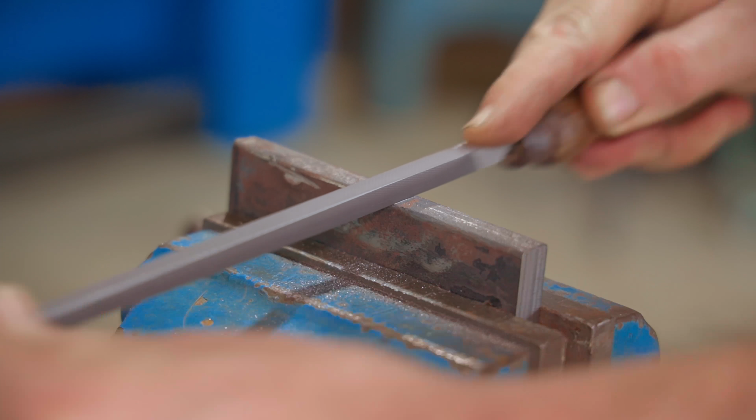You may already know that I'm a little strange. I actually enjoy filing, even though I've always wanted a die filer which will help efficiency, but it would also help in keeping the file perpendicular to the workpiece and increase accuracy. While looking for inspiration, I kept falling on this 100-year-old Hartford die filer, so I modelled something very similar in Shapr3D. I won't be building it on my own though.

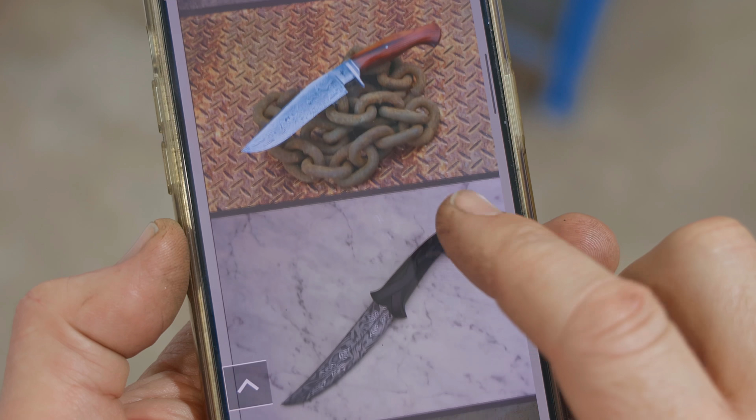I'll be getting some help from my mates Corin and Keith. You may remember Corin from when we built the kayaks together, and here's some examples of Keith's work as a world-renowned knife maker. Anyway, let's get into it, and the first thing we'll make is the base.

I want the whole thing to have a bit of weight to it so it doesn't shake around all over the place, and that's why we're using this cast dumbbell weight. We'll start by truing up one side and then we can flip it over in the chuck where we'll get a better hold in the jaws.

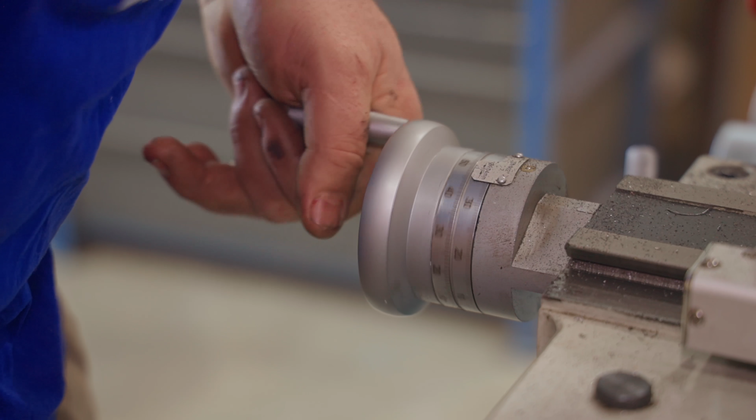Casting the body of the die filer would be the best way, and casting is something that I definitely plan on trying out, but at the moment I'm not set up for it, so instead we'll fabricate it using bits of old castings and steel. The cast iron chips or dust make a real mess of the lathe. I did order some way covers, but they didn't arrive in time.

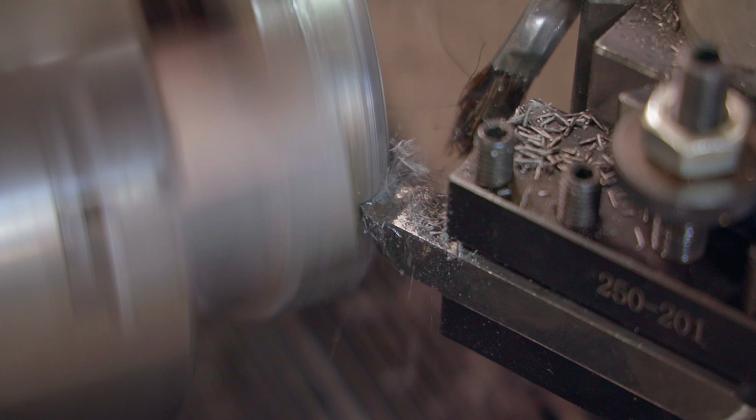Just after starting, the way covers came in the post, so we fitted them temporarily with magnets. I will fit them properly later on. Corin and Keith were visiting this week and we wanted to make a project. We had no real plan, but when I told them about upcoming projects, they jumped at this one.

One side done, now for the other. This one will be the top and have a bit more shape to it. First we'll bore out the centre, which the next piece of the body will be made to fit into. It's going to be a small die filer, but hopefully it'll be a very practical and usable machine. The main thing I want is variable speed and that the whole thing runs smoothly and not too fast. It may be surprising what we plan to power it with, but I'll save that for later in the video.

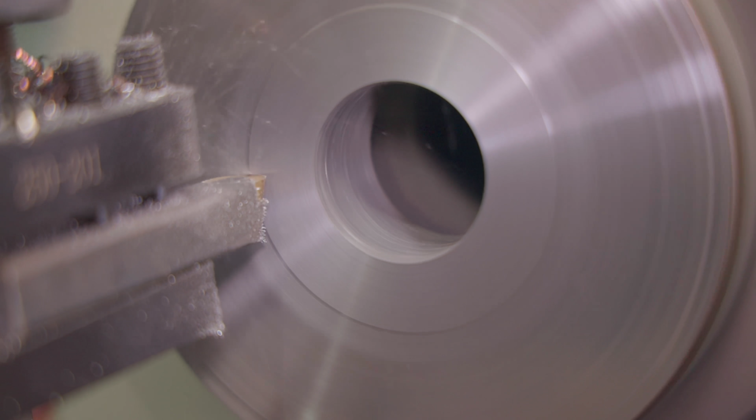There's quite a few parts to the whole project, which to get done in the 3 or 4 days that we had together, we just had to get on and make the parts where we could. So I'm showing them in an order that makes sense and not exactly when they were made. There was a lot going on. Corin and Keith did a fair bit of the work with me doing some and helping out here and there and running around filming the whole process.

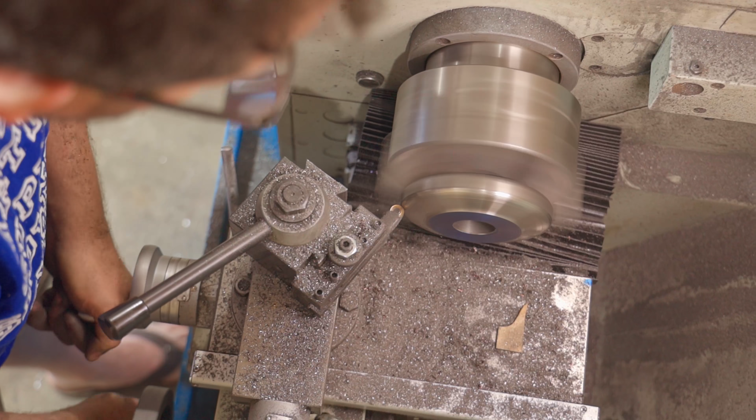The template was just a rough guide, but we turned it down to something close to it. There was a lot of mess that needed cleaning up before moving on to the next part, which will also be turned on the lathe. The cast iron dust is not good for the ways, it can wear them out and it gets everywhere.

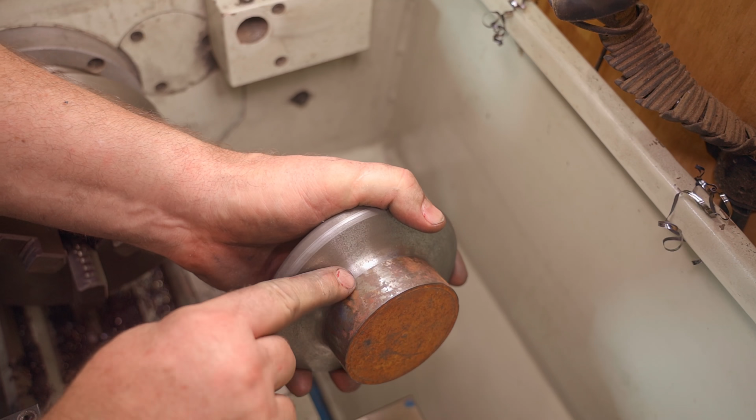The next part is steel and we'll turn that to fit into the base. I'm not sure what type of steel it is, but it is free machining and it's an offcut from a local CNC workshop. Next we'll turn down a taper to add a bit of interest and make it a more pleasing shape, but first we'll face off what will become the top surface.

While Corin was turning these parts, Keith was working on the main upright, which was cut from a sheet of 16mm thick mild steel plate. We'll attach a template using thin CA glue.

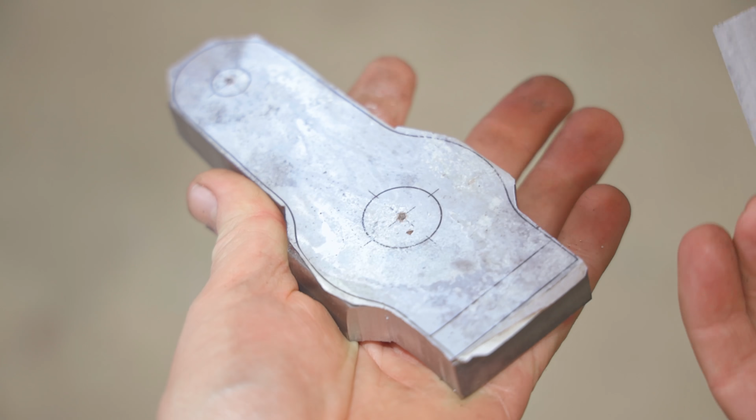Keith also cut out a second piece which will be a top support and that'll get attached to the main upright. He's cleaning them up on the awesome new Brodbeck grinder, which I'm really enjoying, with lots of accessories, making it super versatile. We need to drill a couple of holes, one for attaching a table and the other for a bushing which will carry a shaft from the motor.

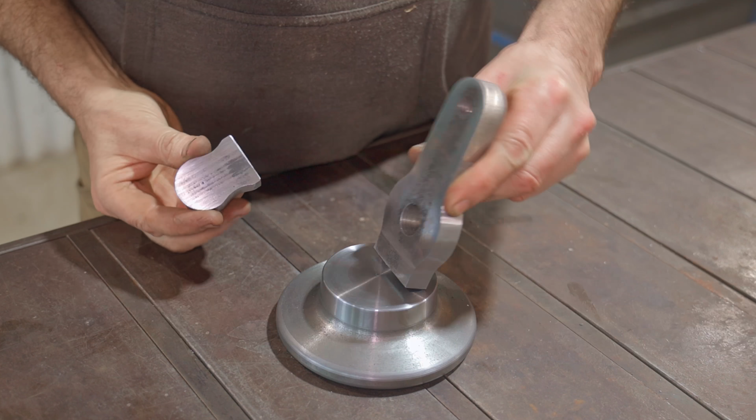This is how the pieces will be arranged, and we turned this other piece off camera, which will be a boss on the back of the upright, and next I'll weld that piece on.

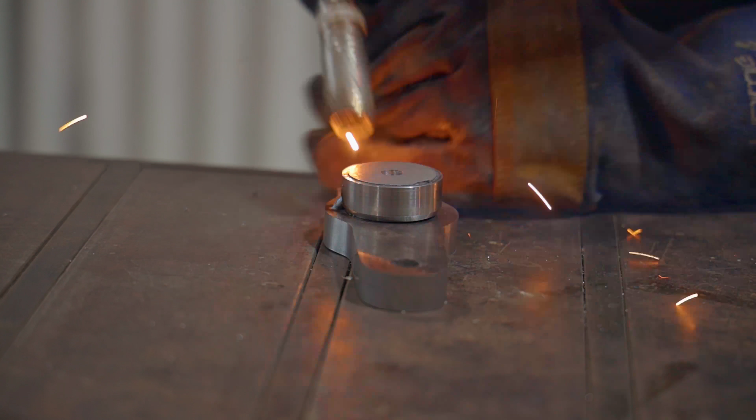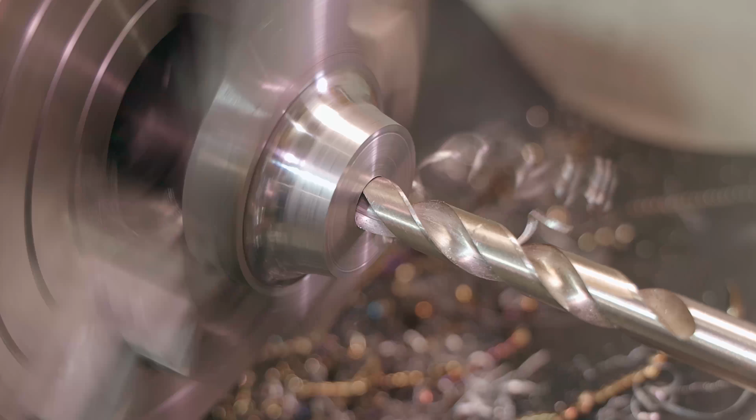Next we put it in the 4-jaw chuck on the lathe and set about machining it. It doesn't look like we're doing anything here, but we are cleaning up the whole face of the upright. We didn't completely clean up my welds, but a bit of filler here and there when we come to paint it, and you'd never know. Next we bored it out to the final dimension, ready for a bushing.

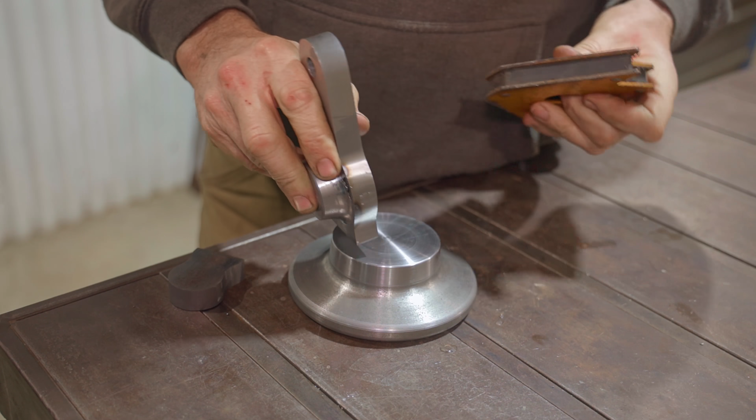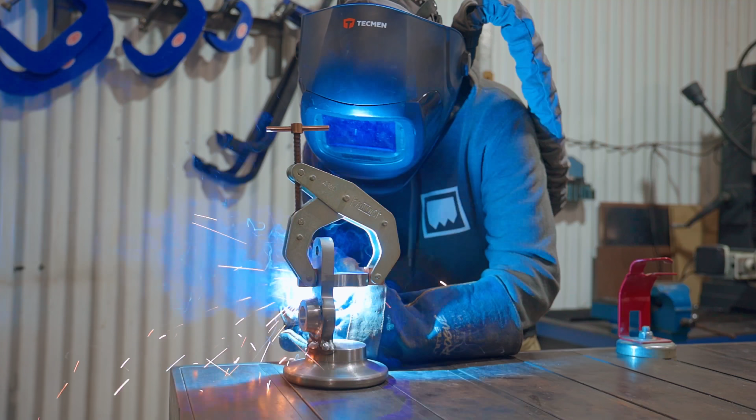Now that all the pieces for the body have been prepared, I'll weld them together. I've added a bit of extra weld on the side so we can sculpt them later on and make nice transitions. That was the end of the first day, so the next morning Keith took it into the grinding room and started to shape and refine it.

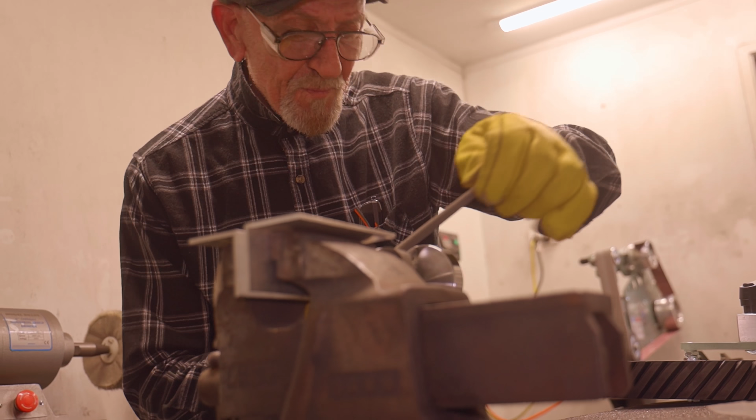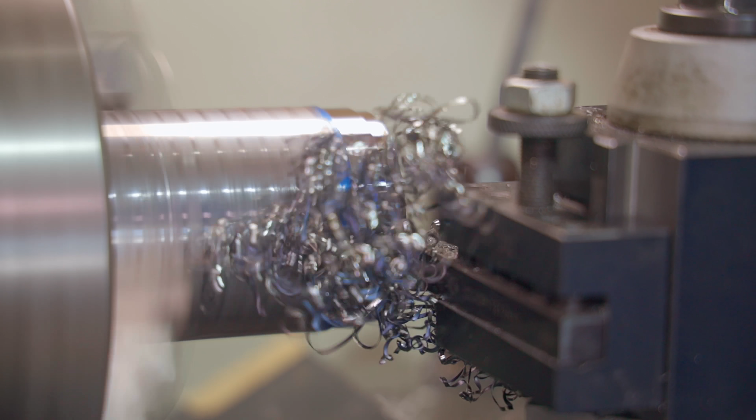Next I'll glue the column section into the cast base, and to do that I'll use Loctite. The pieces are a great fit, so this should glue together very well. While that's setting, we'll start working on the flywheel, which we turned from a piece of EN26 steel. We'll cut a decent chamfer on the back of the flywheel to give it some clearance as it gets close to the weld fillets on the body.

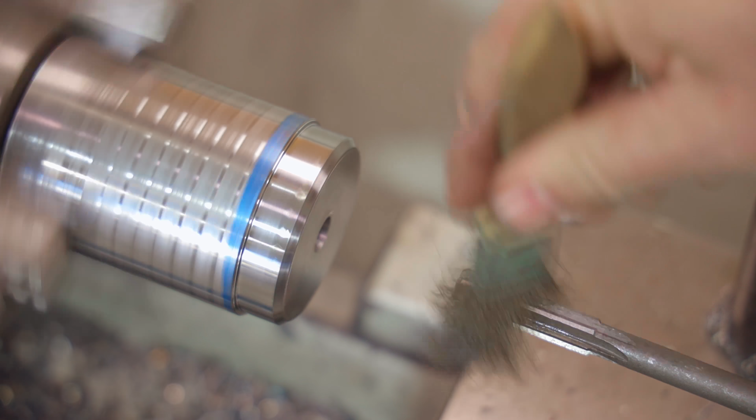We need to add a dowel pin to the flywheel that's off-center. This will create a cam and drive the main vertical shaft up and down. I'm using one of Corin's awesome carbide center punches.

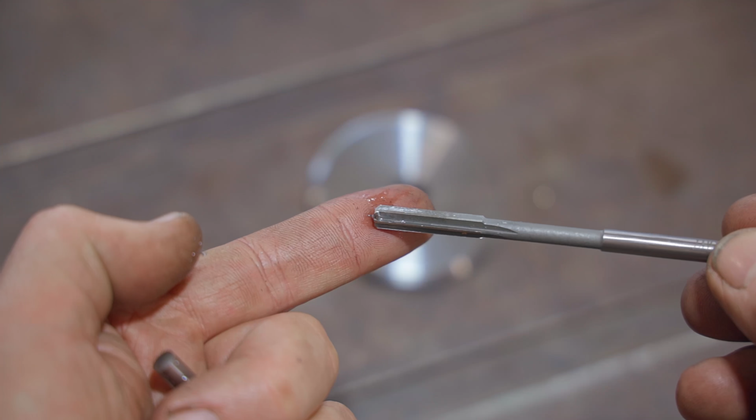After drilling the flywheel, I then reamed it, but this cheap reamer ended up being oversized. So we took the Niroc carbide center punch, and Niroc is Corin backwards by the way, and created divots all the way around the pin. There's no way a regular center punch would do this, or at least it wouldn't without any damage, as the pin is hardened steel. We did get a bit ahead of ourselves there, as the pin is too long and it needed cutting down to length, but we let that set and then we cut it down off camera.

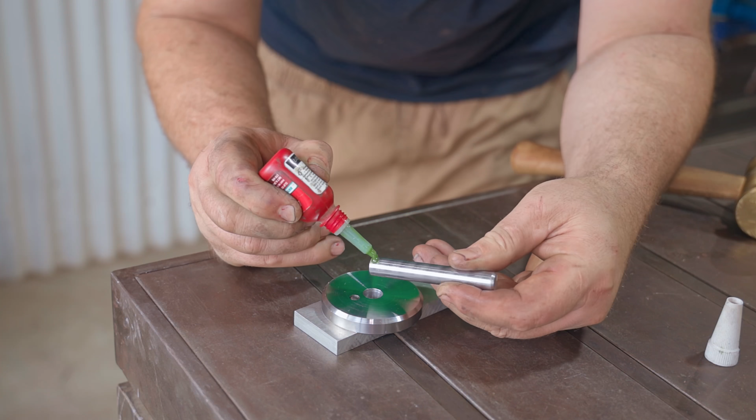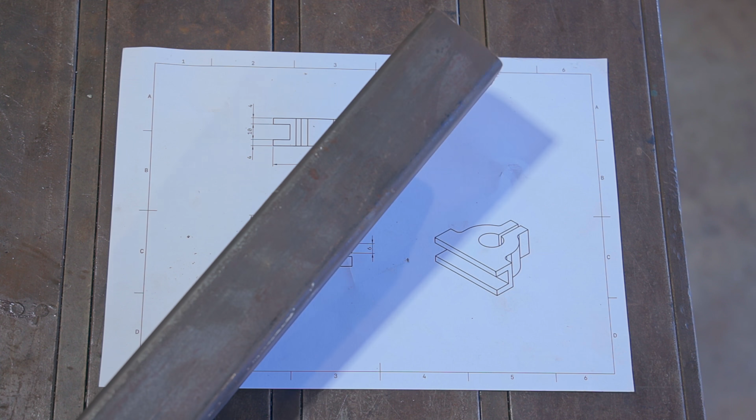Next we'll glue in the drive shaft, which is made of silver steel, and fortunately the reamer for this worked very well and it was a good fit. Next, we'll make this part that clamps to the main shaft. It needs to be 18mm thick. I don't have any flat material that thick, so we'll take a slice off this 50 by 50mm square bar.

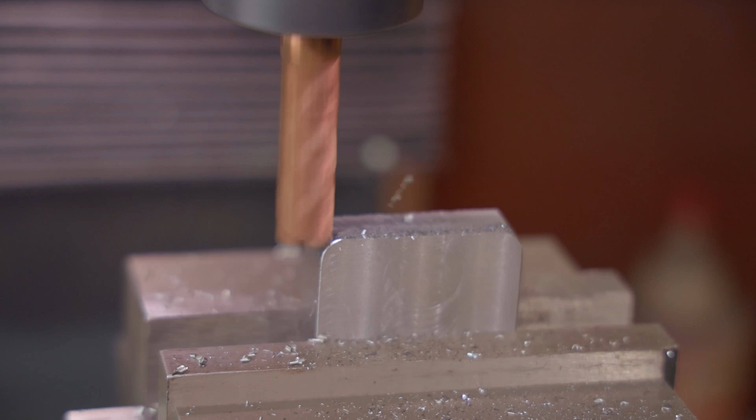We'll shape the outside later on, but first we'll face up this edge and cut a slot. A square nut that will sit on the pin of the flywheel will also slide in this slot, and that will transfer into an up and down motion.

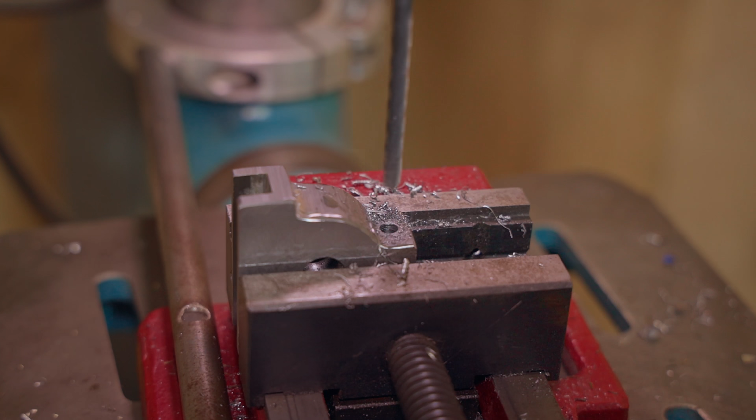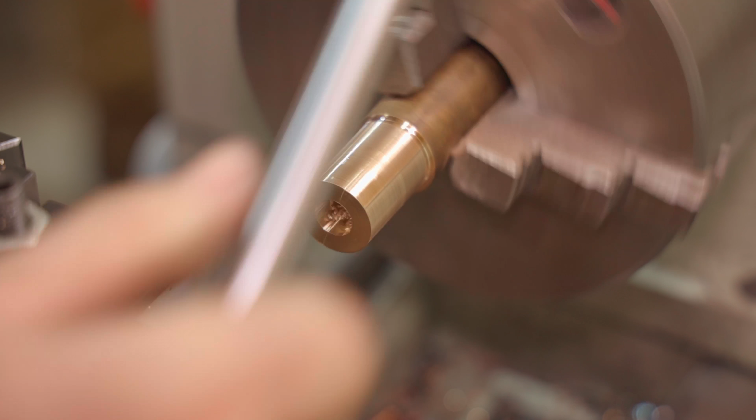I'm drilling all the way through the clamping section with a tap drill. Then after tapping the threads, I'll go back and drill out the threads on one side for the bolt to pass through. That's the clamping piece done, so now we'll make the main bushing from a piece of bronze bar stock. We don't need any glue here, we'll press it in as it's a super tight interference fit.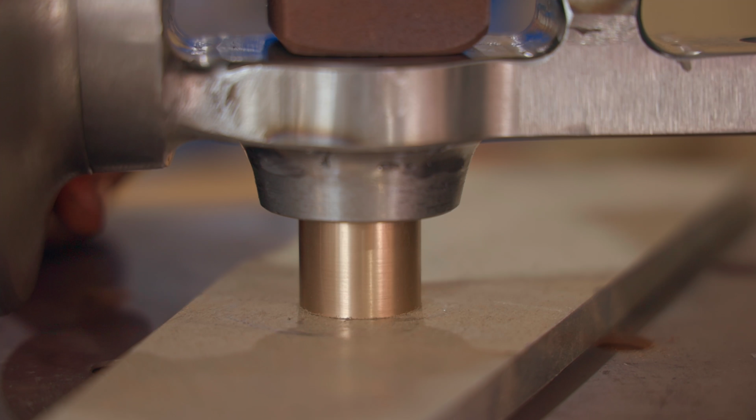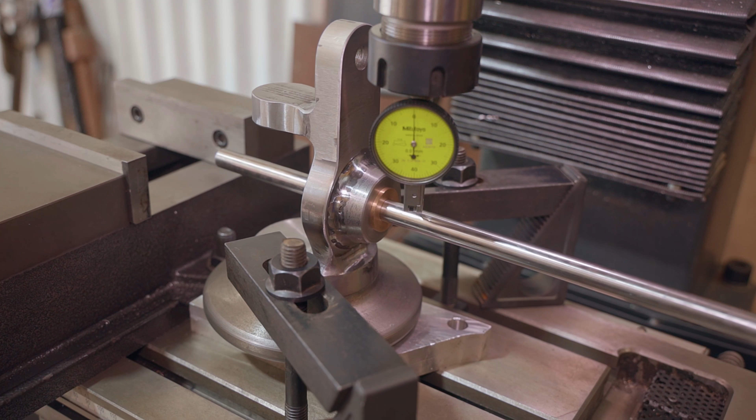That went well, so next we'll bore out for the vertical bushings. We've indicated a horizontal shaft across the top and the side, so we're confident that the bores that we're about to drill will be perpendicular. The drill bits are just about long enough, and drilling both holes now after it's been welded together ensures that they'll line up. We're going through with increasing size drill bits, and the final size will be 18mm.

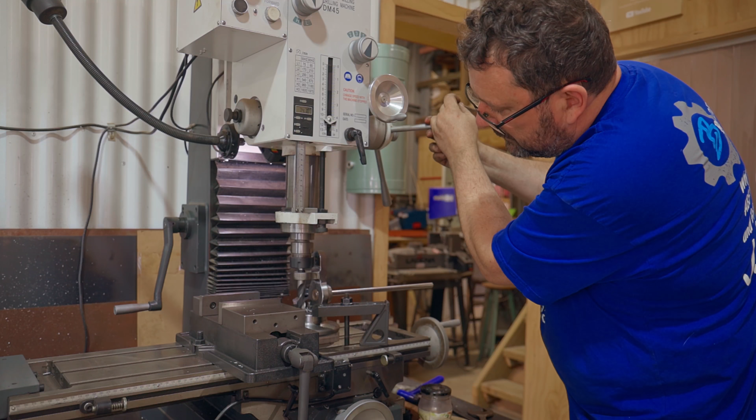And here's the bronze bushings ready to glue in. We left those to set while we had lunch and then came back and drilled them while it's in the same position.

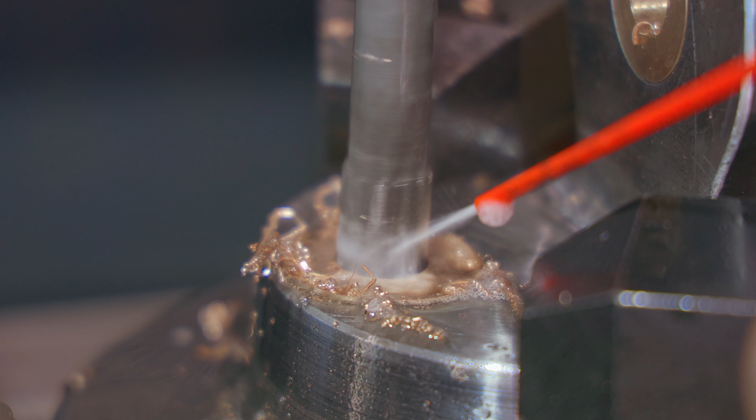That's just about perfect, but the one thing that we did forget to do though was drilling mounting holes in the base. We were supposed to do that before welding on the base, and now it's going to be difficult to access.

First we need to machine a flat, but I don't have an end mill long enough, so we've ground this old cheap drill bit to see if that will work. We need a flat for mounting the screws to sit against and also to help drill the holes. It's deflecting a little and it's not perfect, but it is working and it's getting the job done.

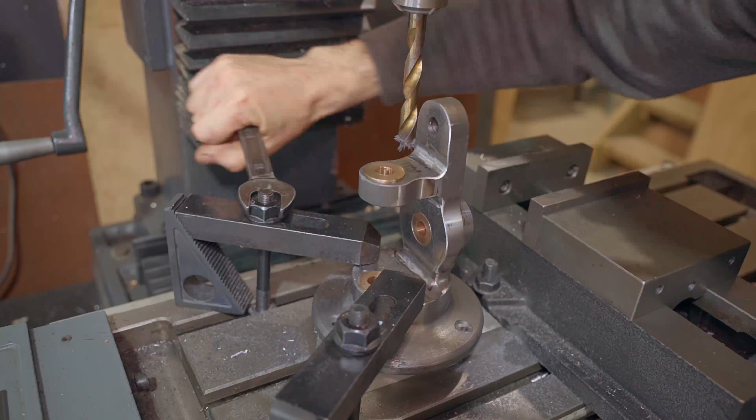We milled the flat again after drilling the hole, and the modified drill bit was a lot happier with the centre gone where we drilled the hole. So much better. We did the other two off camera, so next we'll make the cam nut and we'll do that from bronze.

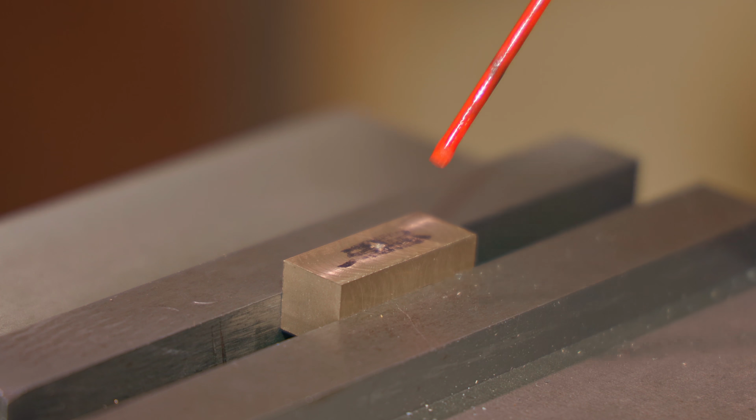Once more, there you go, that's it. That's all the parts that we need to try out the mechanism. I'll quickly assemble it and power it with a cordless drill.

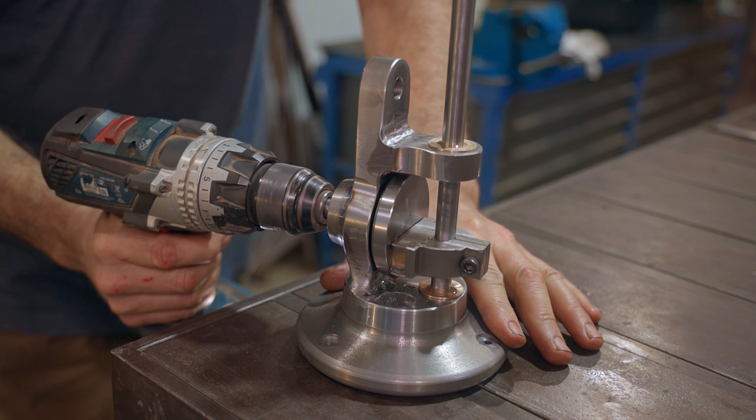That was amazing and it looks like it's going to work well. Next we'll make the table, and again we'll use a dumbbell weight as I really want a cast iron top. Corin turned a shoulder on it so we could mount it better in the chuck, but first he decided to remove the bulk of the material on the belt grinder before machining it.

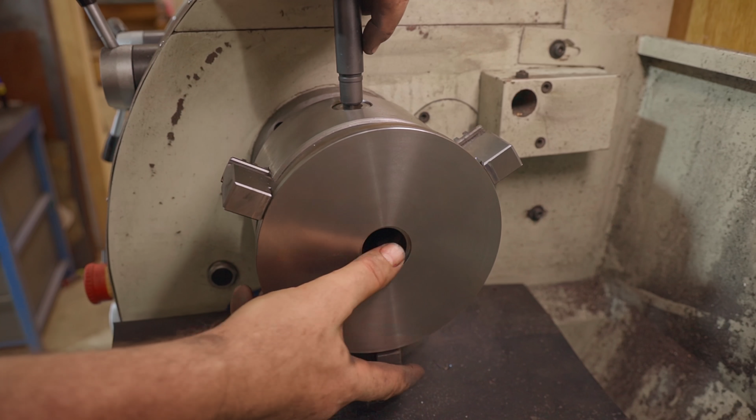After boring it out, we machined a recess for an insert to fit into. That came out amazing. Off camera, Corin turned off the lettering underneath. It's the end of day 2, so I painted the underside of the table, the body and the clamping piece so they can dry overnight.

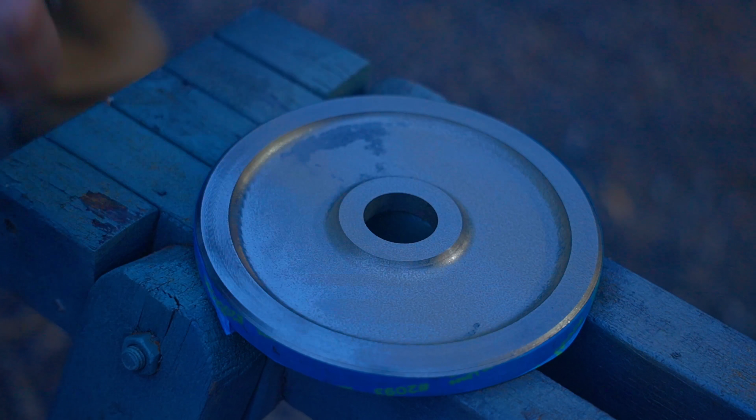The first coat dried in about 15 minutes, so I filled it with 2-part filler, sanded it back and put a couple more coats on. Next we'll make a bracket from this angle to attach the table to the die filer body. We're actually still on day 2. We've decided to go back into the workshop after dinner and do a bit more. Here we're shaping the bracket to fit the underside of the table.

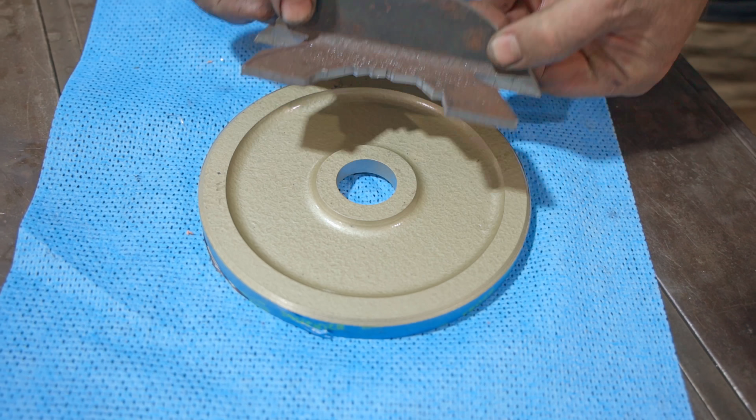We've got the small wheel attachment set up on the belt grinder and cleaning up the bracket.

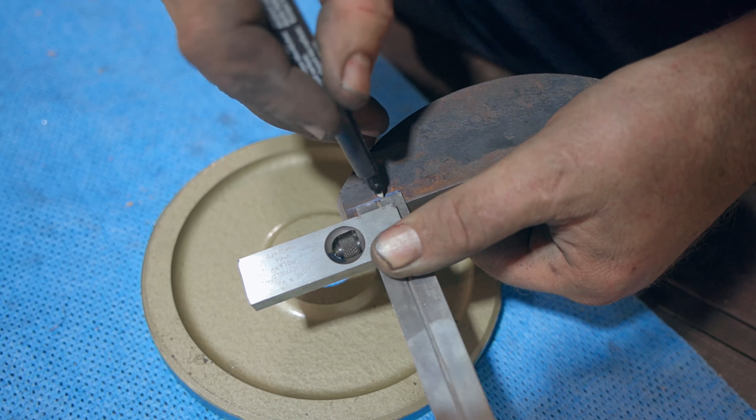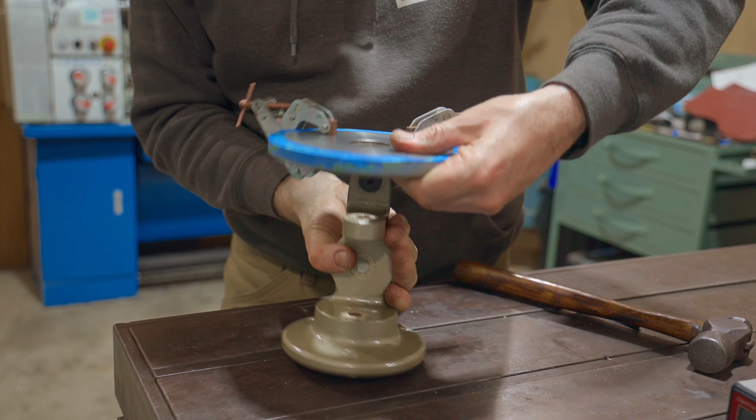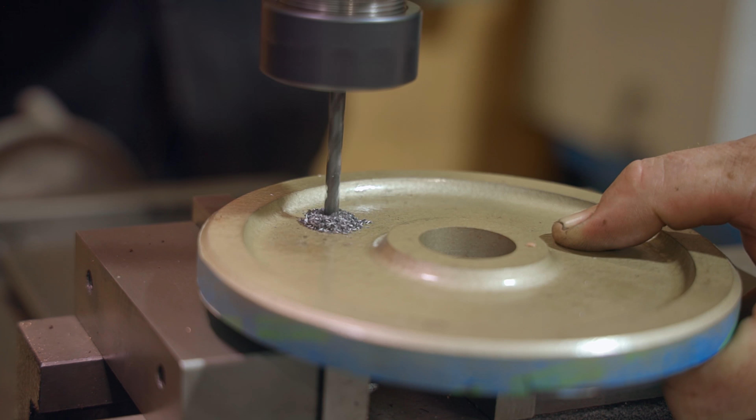To mount it to the table, we'll use 4 bolts. We'll drill through holes in the bracket, transfer those onto the table, and then drill and tap them. It would have been easier to drill all the way through and just use nuts with countersink bolts, but this will be much nicer. We did 2 holes first, bolted it in, and then transferred the other 2 holes.

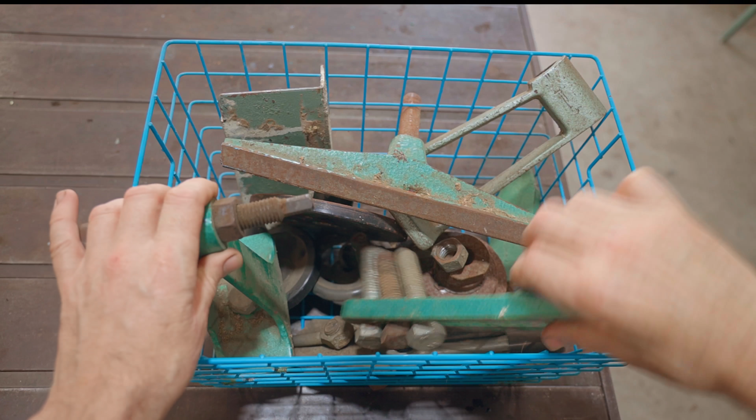It's all starting to come together. Next we'll make an insert for the table. I'm looking through all these cast pieces left over from an old broken lathe for something suitable. The next piece is a wiper on the top bushing to help prevent filings from getting in there. We'll make an oversized guard from brass with a single mounting hole and then an insert from Delrin that will fit against the shaft.

Corin came up with a clever idea to use the burr left over from parting off the insert, and we'll use that as the wiper, and this was the reason for using Delrin in the first place. We're starting to get close, so next we'll make a pulley from aluminium that will be belt driven from the motor.

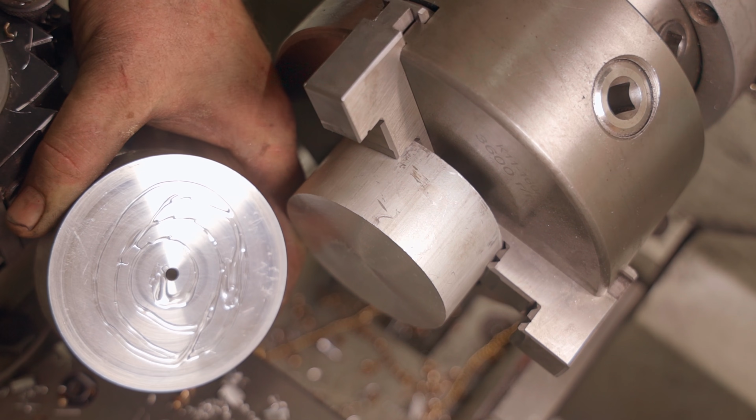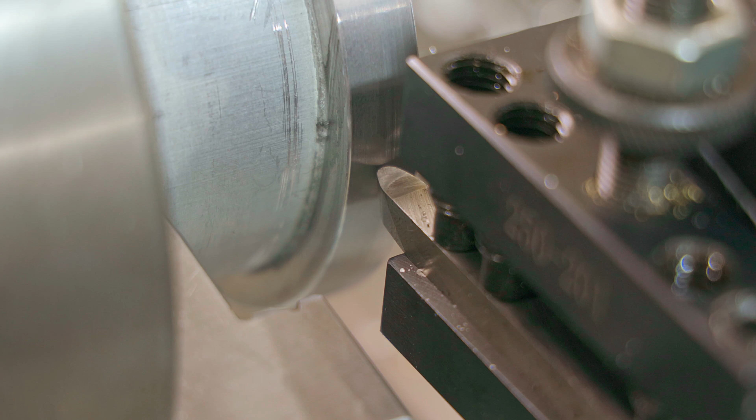And here's how we're going to power it. A sewing machine motor. It's already variable speed, which will be perfect. We're not 100% sure how well it will perform, but we're pretty confident. We've ground the form tool to match the pulley on the motor, so next we'll cut a groove in our pulley.

That's the pulley done, so next we'll drill the end of the vertical shaft to accept a file. We'll then drill and tap through the sides of the shaft for grub screws to hold the file in place.

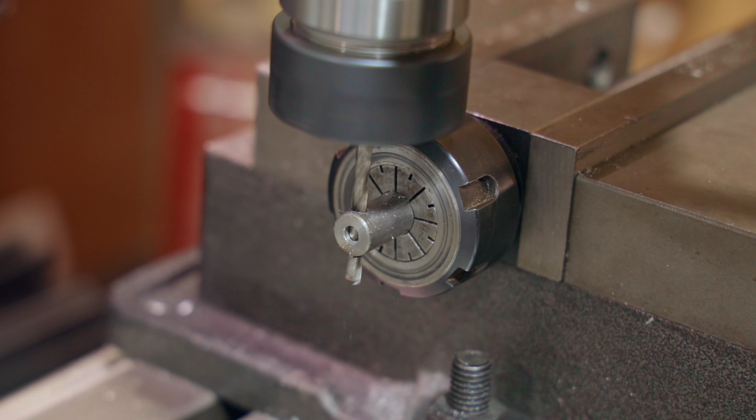We're moving along quickly now as Corin and Keith want to see it running before they leave. Anyway, the next part is an aluminium block for mounting the motor to a board, which I'll prepare next. It's a piece of reclaimed silky oak. I won't do anything special, just clean it up a bit, add some filler and put some oil on. While I'm at it, I'm preparing a couple more boards for Corin that he'll use to display his tools when he's selling them at shows.

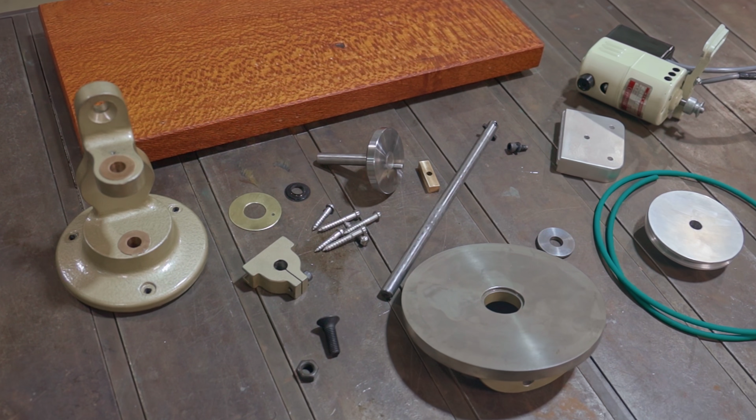That's almost all the parts. We just need some mounting screws. These stainless steel lag bolts will work, but I'd like the heads to be domed and slotted, which will suit the machine much better.

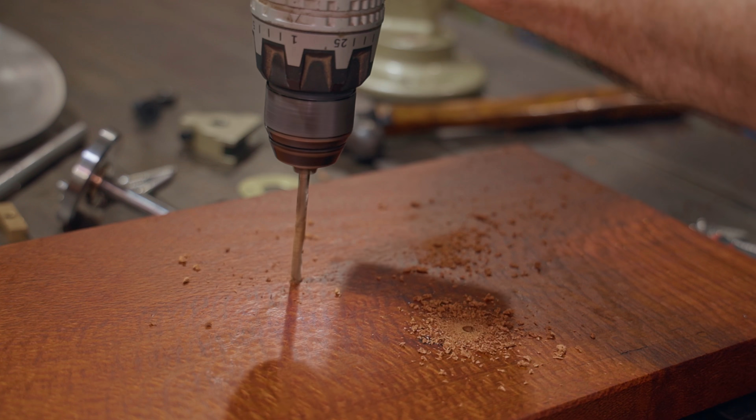So now the exciting part, putting it all together. We made a couple of bronze washers off camera. You can see one of them here already on the back of the flywheel. I also remade the bronze nut as the first one wasn't quite long enough. We haven't ground a flat on the shaft, but we'll see if the pulley slips, and I can do that afterwards if needed.

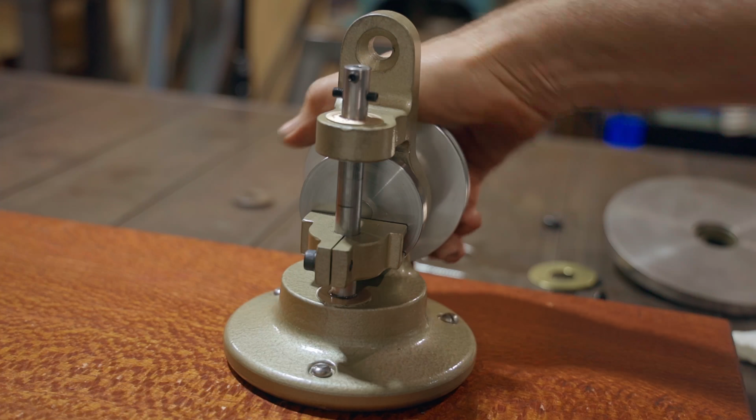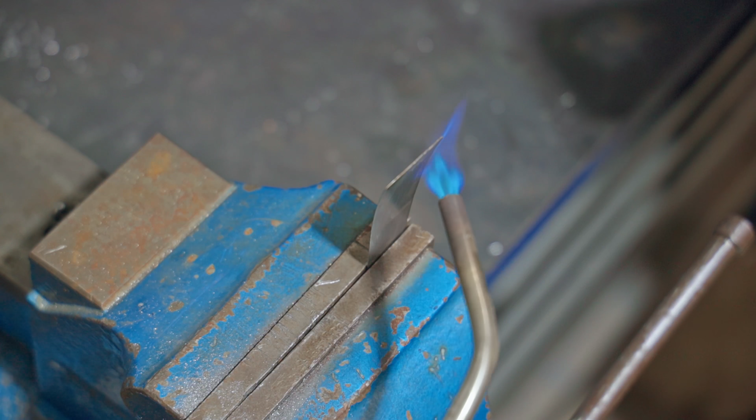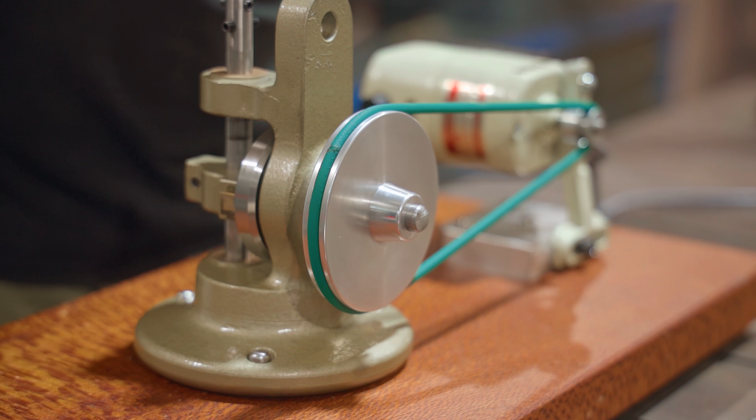We need to cut and join the poly belt. None of us have done this before, but it was actually very easy. That looks like it's going to work with plenty of control of the speed, and it's not jumping around all over the place. I didn't show it earlier, but you can see that we drilled and tapped holes in the shaft at 2 different heights. This should allow us to make fine adjustments to square up the file to the table.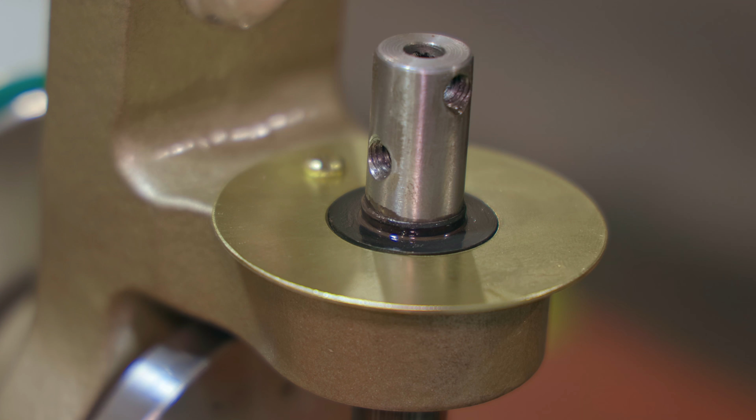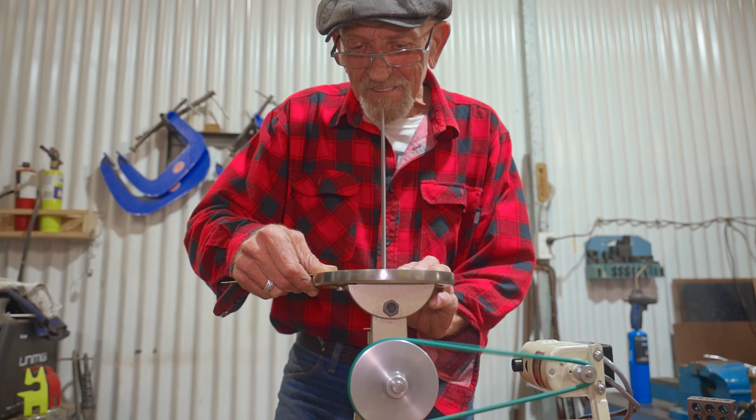The files for this need to be parallel, so to start we'll use a chainsaw file, which is the perfect size. We'll mount it from the tip so the files are cut in on the downward stroke, and again the chainsaw file tip is the perfect size. It's ready to go, and Keith jumped in there first. We'll cut the file down next, and then Corin can have a go. Don't do much. It's working great, and that's a fairly fine file.

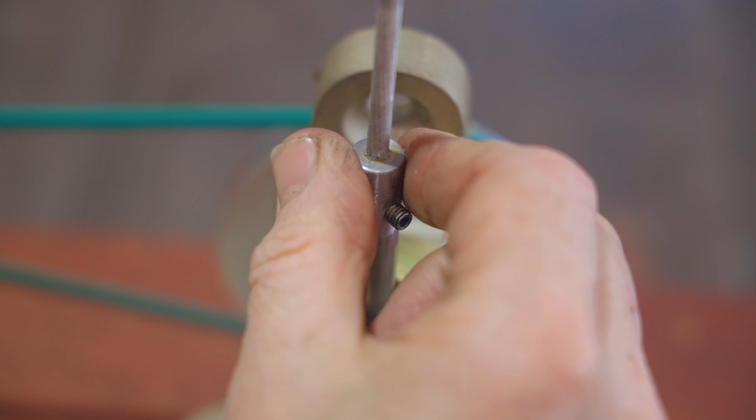Anyway, it was all a bit of a rush at the end, and the guys have now left. I've got a couple of things left to finish. I rotated the shaft 45 degrees, so now I can access all 4 grub screws. The way it was, the one at the back was difficult to get to. And I also made this top hat off camera. The original die filers had a piece like this, but they were used to hold the file in place. I didn't realise that it also deflected filings away from the shaft, so I decided to make one.

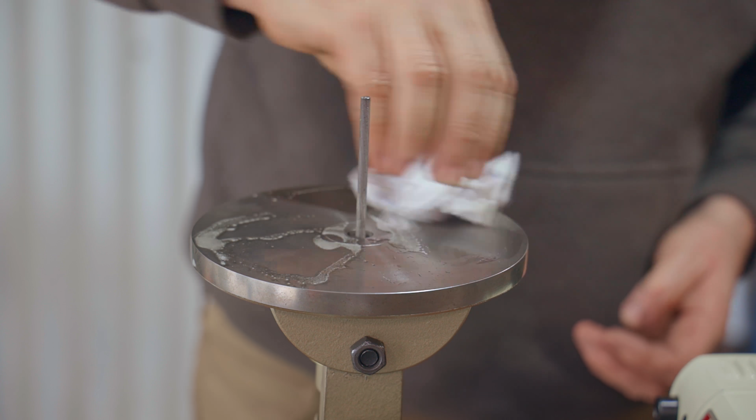To prevent the table from rusting, I put Boeshield T9 on, which works amazingly well, so now it's time for me to give it a go. It's a great little machine and it's super fun. I need to make some other files fit as well, and I have a plan how to make that happen. I'll cut this square file down first and then I'll show you the setup.

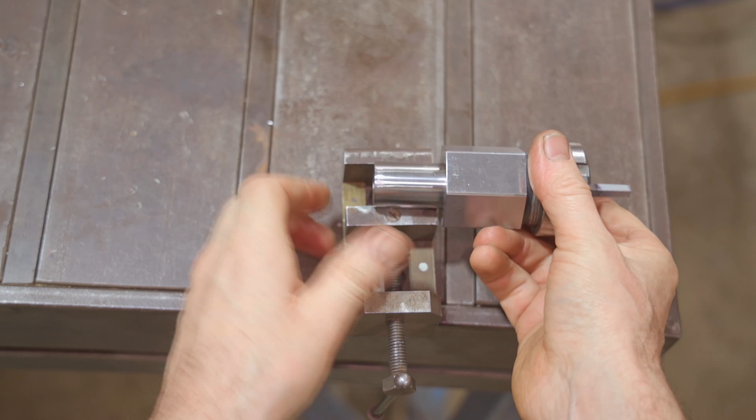I've drilled a through hole and turned down this bar with a slight shoulder. It just about fits through a collet block, and the shoulder is enough to stop it from going all the way through. I then made a collet out of Delrin to hold the file in an ER collet. I'll hold the shaft in a vise, and then I'll be able to spin the collet block with the file to grind a tang on it. That worked out great, so let's put it in and give it a go.

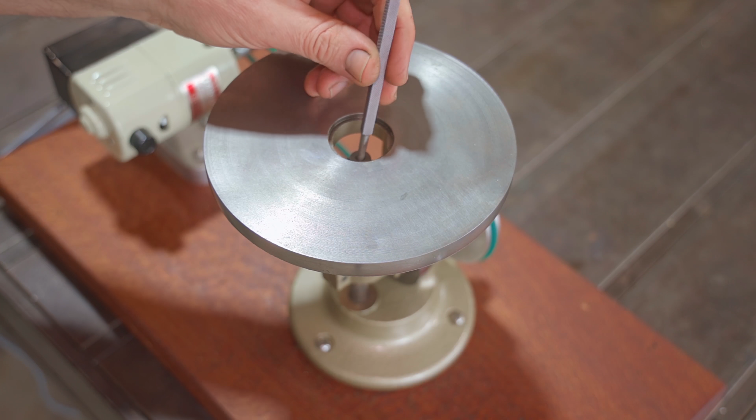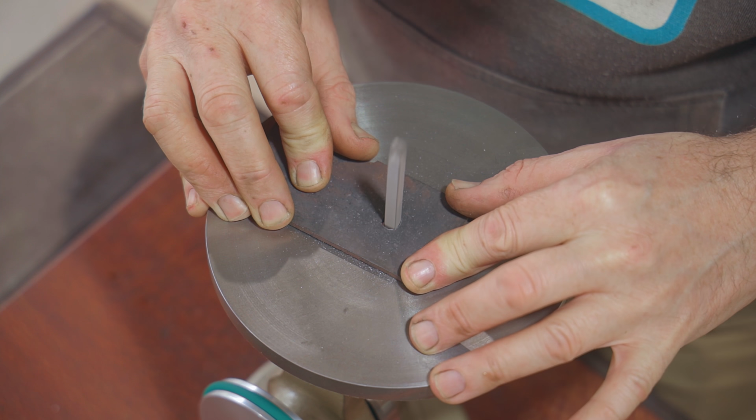I still need to get more files, a triangular one and also a few with safety edges ground on. I tighten the grub screws, then back them off just a touch. Then with a 1-2-3 block, I tighten them again, making sure to keep it square to the table. It worked perfectly and it was super easy to do. I'll try it with a piece of steel. It's a bit thicker as well, and I'll try and square up this hole. And this is the kind of task that I imagine that I'll use it for.

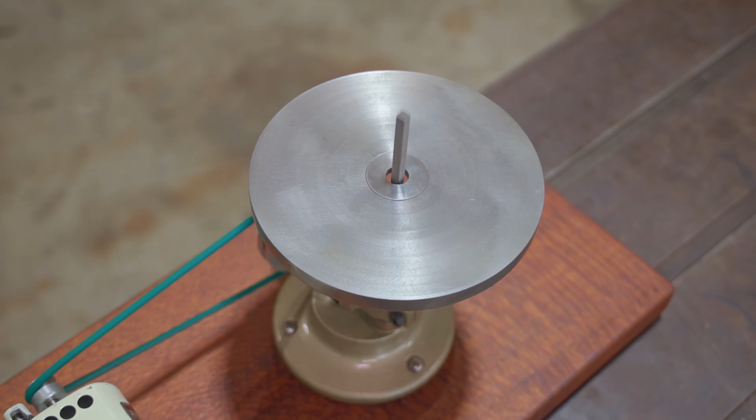I'll do a quick test on the brass just to see how well the coarse file works. And that really does work very well, so I need some coarse files and some fine files. Anyway, it was a super fun build. A big thanks to Corin and Keith for an awesome few days and for all their help.